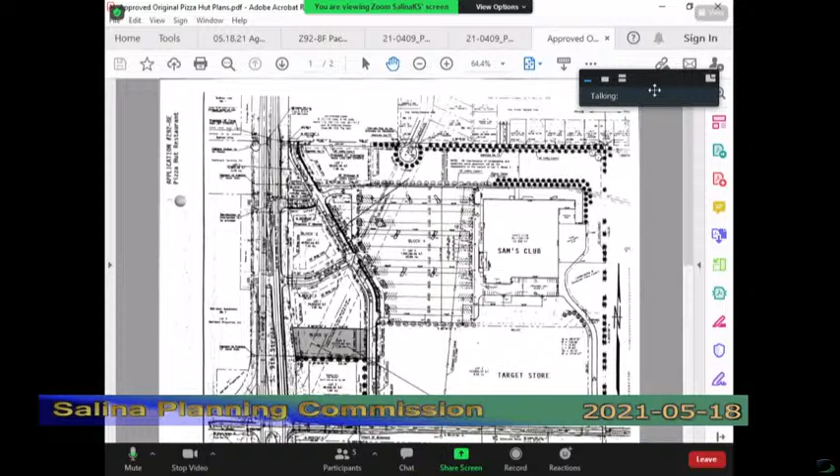But by way of background, what is labeled or known as the Matlock Johnson addition was approved by the Planning Commission in 1992. That was a subdivision at the northeast corner of Schilling Road and South 9th Street that was anchored by a brand new Sam's Club. There was a plat of 44 acres there that had multiple lots, including outlots along 9th Street.

The City Commission gave final approval to ordinances that annexed and zoned that property back in 1992, and it was a planned commercial district, so the ordinance that was passed provided that site plans for the remaining lots must be approved by the Planning Commission before building permits were issued.

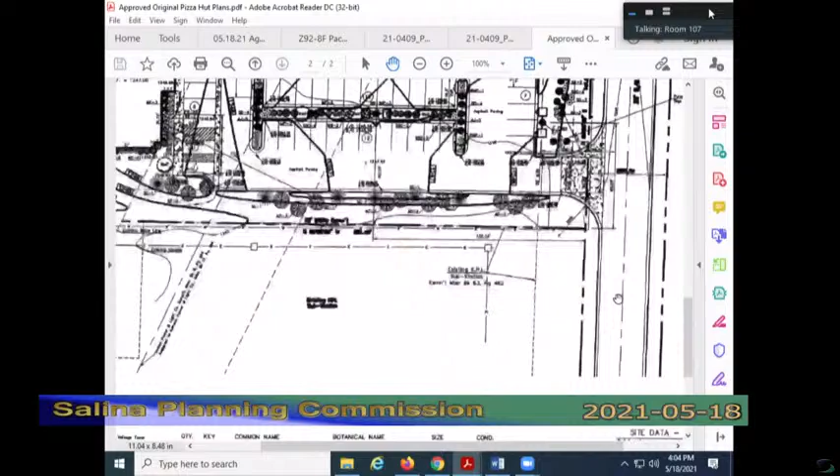So in April of 1994, Pizza Hut Restaurants filed an application requesting the Planning Commission approve their final site plan for a proposed 3,500 square foot Pizza Hut restaurant on the lot south of Red Lobster. That was essentially the 5th outlot outside of Sam's Club that was proposed for development, and it was the last lot to be developed in the subdivision.

Dustin, could you go back to the original layout of Matlock Johnson, the vicinity map? So the layout of the subdivision was 44 acres at this corner.

You may recall that Schilling Road was nothing more than a dirt road at that time, so the developers constructed Schilling Road over to an access road here, and then constructed Marketplace as a frontage road. At some of our intersections, like Belmont and 9th and other locations where we had frontage roads right next to 9th Street, there was barely room to stack one car or even get your car straightened out to make a turn. So we changed our planning philosophy on frontage roads, and instead of having the frontage road run right next to 9th Street, you'd move the frontage road out so that you had lots backing up to 9th Street, moving the frontage road away so you could have more room to stack traffic to 9th Street and move these entrances away.

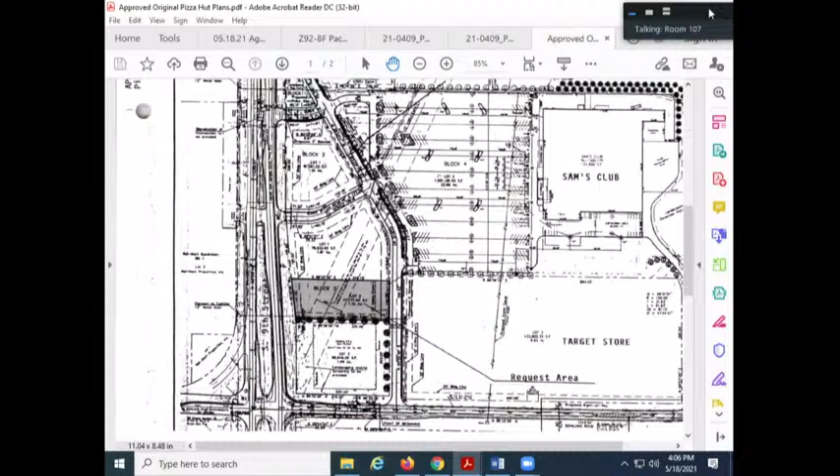So the original plan had a single building. It was 3,500 square feet, and it only covered 7% of the lot. It had no direct access to 9th Street, and the front of the building faced east towards Marketplace. When it was originally developed, they had 57 parking spaces out in that area. The building was pushed way to the west because it couldn't be built under these power lines, and that really influenced how the property was developed.

So the plan that's being put forward now is to essentially remove and rebuild that east building and turn the existing Pizza Hut restaurant into a delivery carryout location only, with no indoor seating, adding a drive-up window on the south side of the building.

There's also a plan to create a second tenant space there. As you can see from the original Pizza Hut plan, the east portion of this lot was primarily used for parking or not used at all. So the owners are proposing to construct a new building with a 2,000 square foot footprint, which could be set up to accommodate 1 or 2 tenants, and also set up with the ability to add a drive-through window on the west side if that's what the tenant desired.

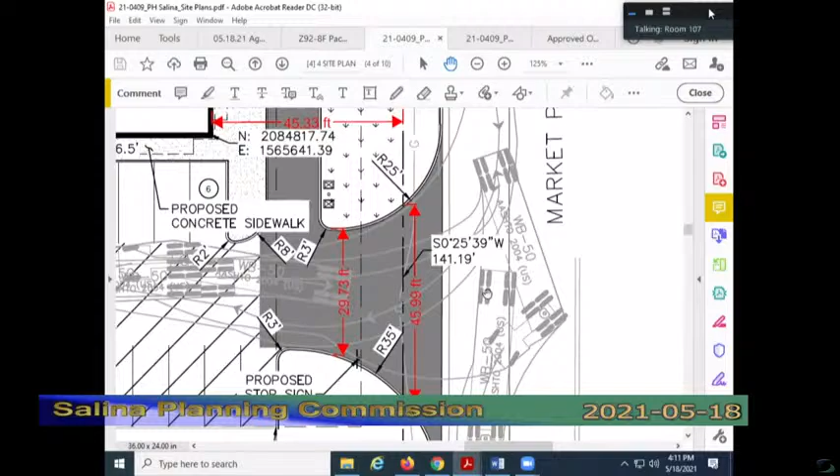We've noted that Sam's Club and Target both receive truck deliveries, and none of their driveway openings are as wide as the driveway being proposed by the developer's designers. None of the driveways that serve the new Dillons store are that wide, so staff believes that that is excessive for the conditions currently on the lot.

Just by way of information, the city, based on the city code, measures the width of driveway at the property line. What the designers have done is something most haven't done, which is to try to increase or include the radius inside the property. So on most driveways on public streets, the curb radius would start at the property line and fan out, but they have extended it farther in, which affects the measurement at the actual property line.

So this measurement here is a reasonable width right at 30 feet, but it's this width out here where we measure the width that makes that driveway width excessive. You can do what you want with the radiuses out within the right-of-way, but it's primarily this area here, on private property, that's wider than the city's driveway width standard and wider than any driveway anywhere in the vicinity.

As far as the public utilities and services and storm drainage, all the services that serve Pizza Hut are in place and can be reused for this redevelopment.

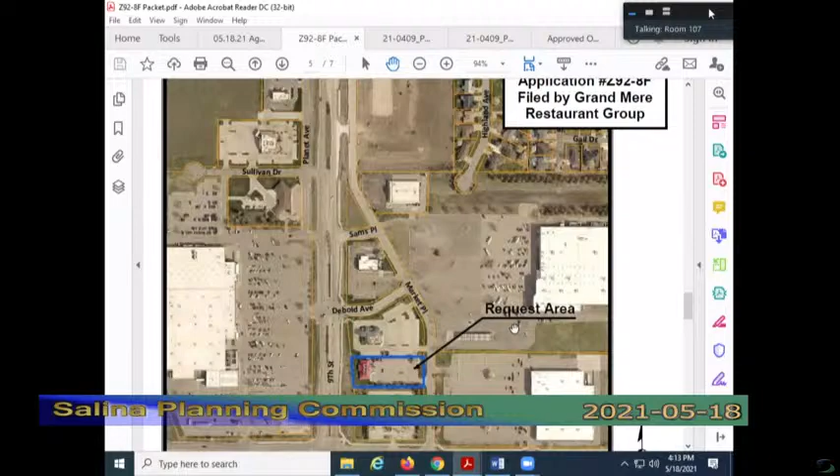So it's a little counterintuitive, but what happens with the drainage is that all this drainage from Sam's Club and from Marketplace here drains into this pond that's north of Sam's Club. Then there's a pump in that pond, and a pipe that comes all the way across here, and it sends the water right to this corner. It goes down 9th Street to a ditch that crosses over and goes that way. So the water first drains north, and then it drains south.

And the reason that it did is that there has been off and on flooding along South 9th Street from all the water moving from south to north, and so this was essentially reverse engineered to send the water back here so it wouldn't be discharged to the north.

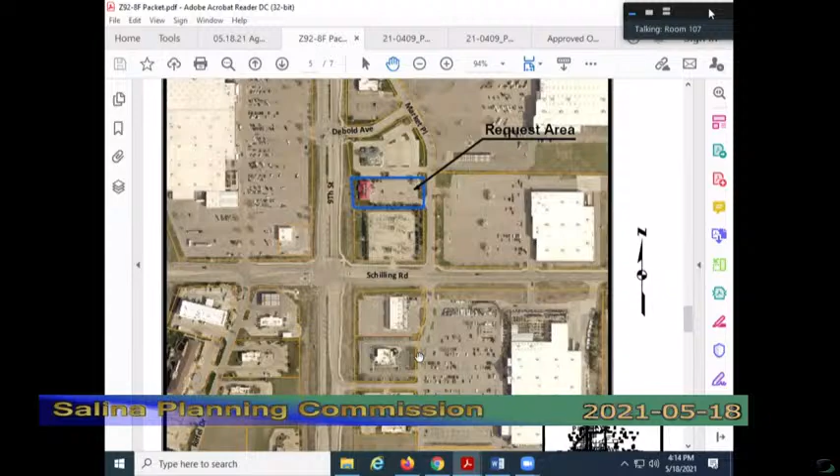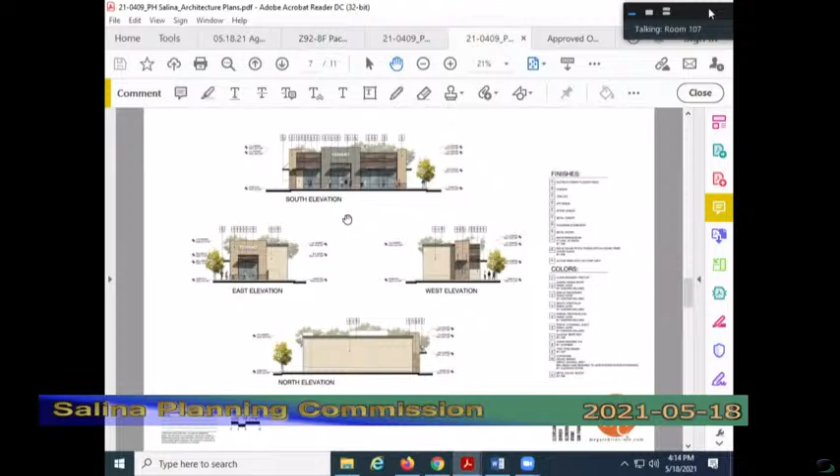The buildings that are proposed would be oriented to face east with their main storefronts facing Marketplace and secondary entrances on the south side. I believe that is the east building, Dustin? This is the east building. Okay, so the east building, you can see that the main storefront glass, the main width is the south elevation, but it will also have an elevation that's oriented towards Marketplace.

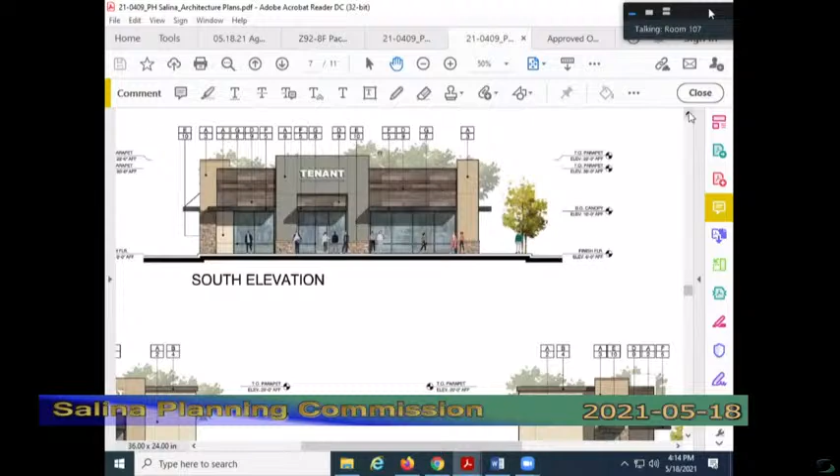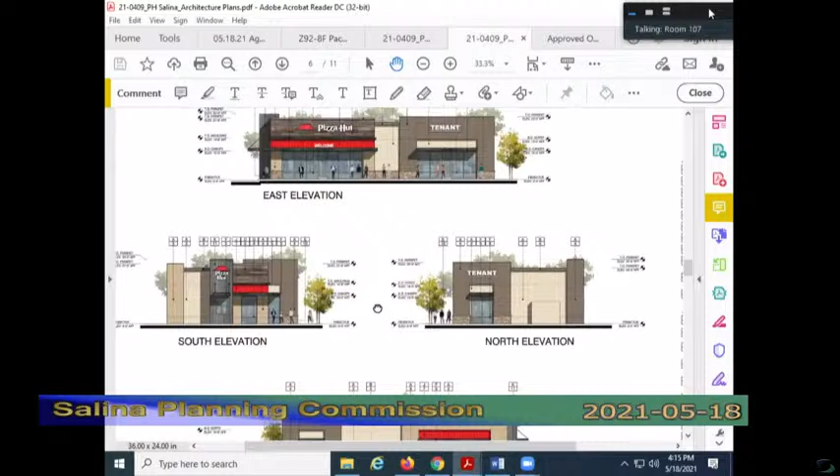So this south elevation facing the substation is where the pickup window for Pizza Hut would be. This is what you would see from Marketplace, this is what you would see from 9th Street, and then that is what is facing north towards Red Lobster.

The building setbacks all conform with minimum setback requirements. The west building, 27 feet from 9th Street, is pretty close to 9th Street compared to the other buildings along there, but it's because of that 100-foot wide Evergy transmission line easement that really forces that building to the west.

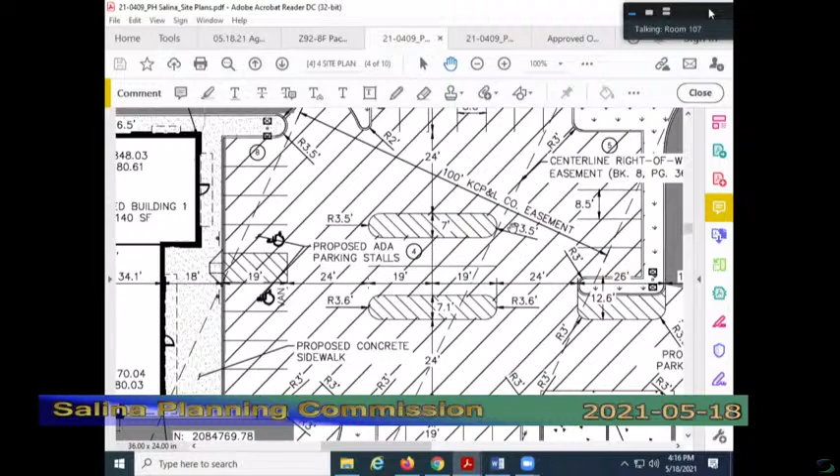So the big changes are that the lot coverage would increase from 7% to 10.7%. The other being that only 37% of the developed site would be green space.

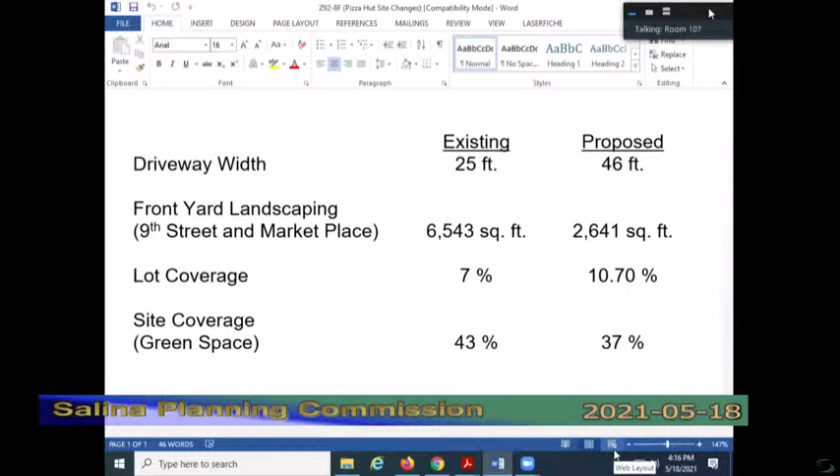As far as the building design, from what we can tell, the exteriors will be primarily cement plaster finish with stone veneer on the storefronts, and then mostly earth tone with slate color used to provide contrast. You can note the bright red canopies to identify the Pizza Hut.

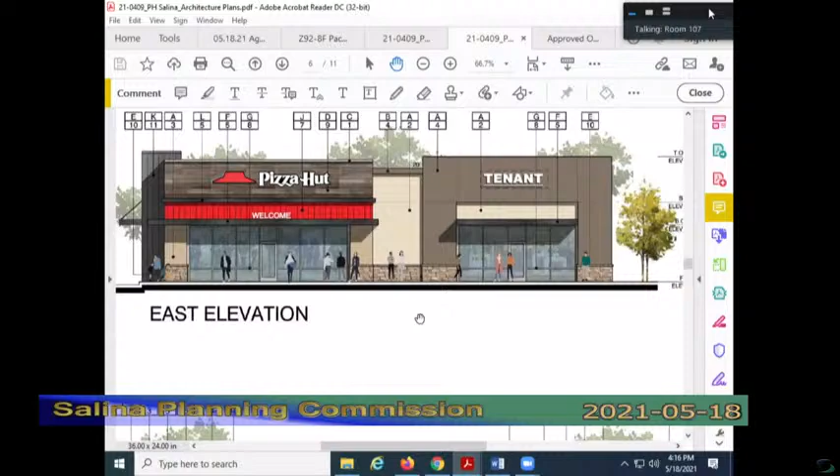As we noted, 45 spaces are being proposed, with the primary reason for the reduction being the elimination of indoor dining at Pizza Hut. We've determined that the 45 spaces is sufficient, and all of the dimensions within the parking lot and driving aisles meet the city's requirements.

Staff's only issue is with the width of the actual driveway approach on Marketplace.

There are no designated loading and unloading zones or areas designated on the site plan, but as we've discussed before, particularly with restaurants, in the alternative, we've allowed the property owner to furnish staff with a written letter confirming that supply deliveries for the Pizza Hut and other tenants would occur outside regular business hours. If you do that, it doesn't matter if drive aisles or parking spaces are occupied by delivering vehicles if it's after hours.

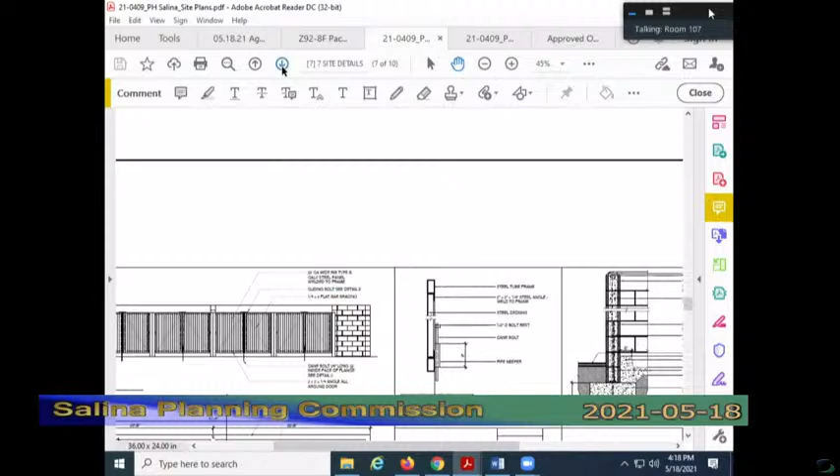The other thing we would note is that this development would have a requirement with the two front yards of a little over 3,900 square feet of front yard landscaped area, and they're providing about 2,600 square feet, about a third less than what would be required under our ordinance. The primary reasons for this are twofold.

One is the drive-through lane paving added to the west side of the west building essentially substituting concrete paving for landscaping. And then, of course, the wider your entrance drive is, the less space you have for front yard landscaping along South 9th Street.

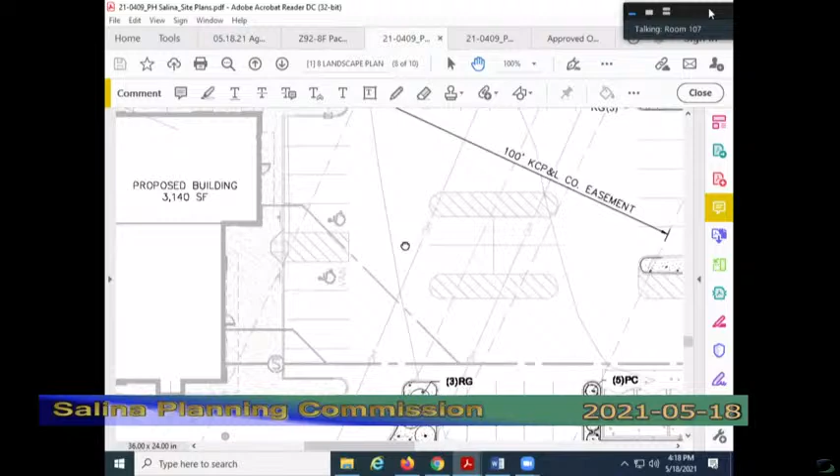One of the mitigating factors that the designers and owners are facing is that transmission line easement. Because the building is pushed so far west, if you put a drive-through lane on the west side, you've pretty much wiped out the 27-foot front yard there, so there's much less space for landscaping.

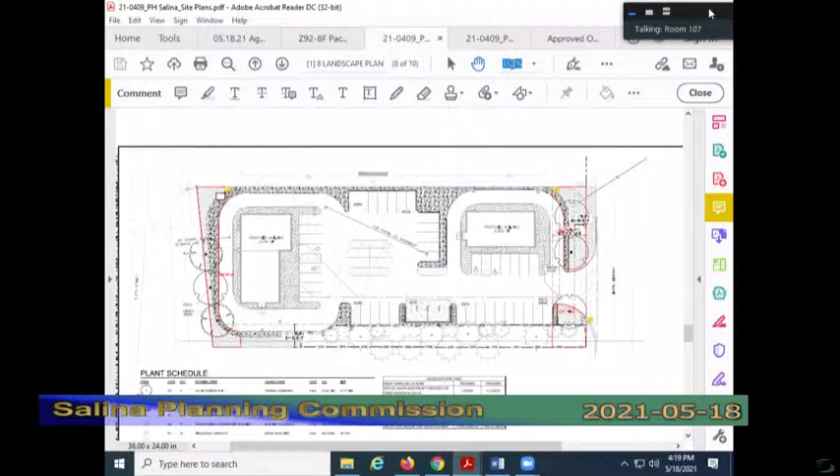If you look at the total amount of tree units provided, it's far, far less than what was shown on the original Pizza Hut plan, but is within the range in terms of actual plantings of what our landscape regulations would apply for a site like this with two front yards.

The only other subject we haven't touched on was signage, and we did not receive any kind of submittal related to ground or pole signs. The Planning Commission previously approved a 70-square-foot pole sign on 9th Street for Pizza Hut, and that sign may continue to be used or reused. Some of the elevation drawings did show wall signage, but that would be worked out with the owner as tenants come along.

So as you look at your alternatives this afternoon, we have reviewed the plan to determine compliance with city ordinances, regulations, and policies. The two areas that we determine do not comply with city standards are the amount of front yard green space and the width of the driveway on Marketplace.

You are to review the plans to determine if they demonstrate a satisfactory quality of design and compatibility with other uses and structures in the neighborhood.

So you could approve the proposed amended plan as submitted, or you could approve the amended plan subject to certain revisions or conditions.

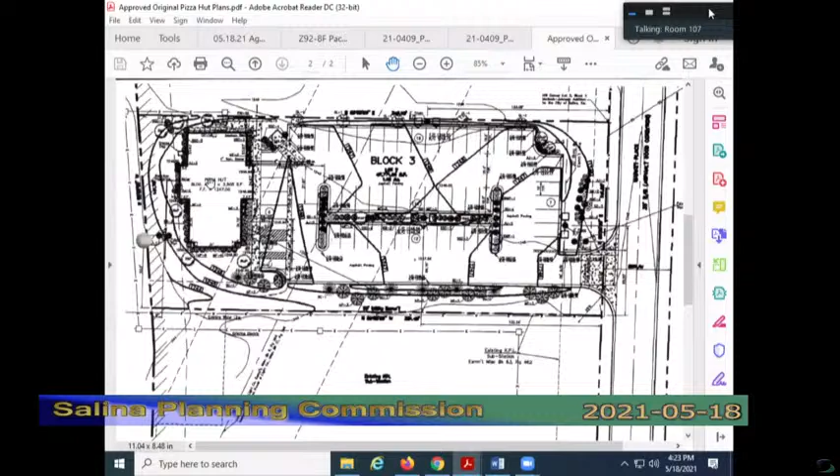The main thing is, and it may or may not show up clearly here, here's the existing Pizza Hut building. And so everything from this wall over to the 9th Street property line is green space and landscaping.

And then if you go to the new plan, they have wrapped this driveway around the building, so all this area that is landscaping today is being eliminated and replaced by paving.

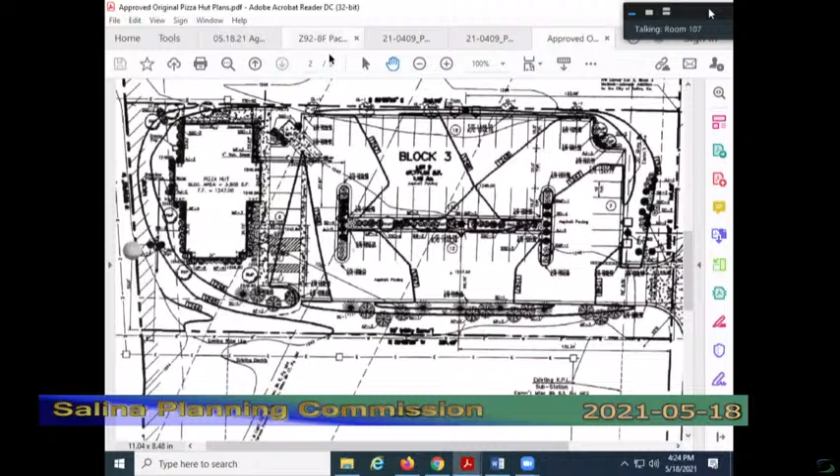So if you look at a front yard as the front 25 feet of the property on 9th Street, under the Pizza Hut original plan, 100% of the area between the building and the street was green space. Under this plan, a substantial part of it is paving. So by that very nature, the landscaping area has been reduced.

The question for the commission is, you can make up for reduced area by having essentially the equivalent amount of plants or plantings that you would have if you had more area. So we have kind of a ratio that says if you're required to have this much square foot area, you have to have this many plant units within that area.

They come close to having the number of plant units that they would need to have if they had the area. So they are attempting to compensate in two ways.

One, by having a roughly equivalent amount of plant material that would be required. And then also, they've got some islands or peninsulas within the parking lot area that we don't credit for front yard, but that does provide landscaping and green space.

So it's a judgment call for you as a commission, or myself as a zoning administrator. I can reduce, and you can reduce, the amount of front yard green space if you think the intent of the landscaping regulations is still being met.

So we're just pointing out that the reason for the large reduction in total square footage is primarily because this was all green space today, and if you put this drive-through in there, you're reducing the green space.

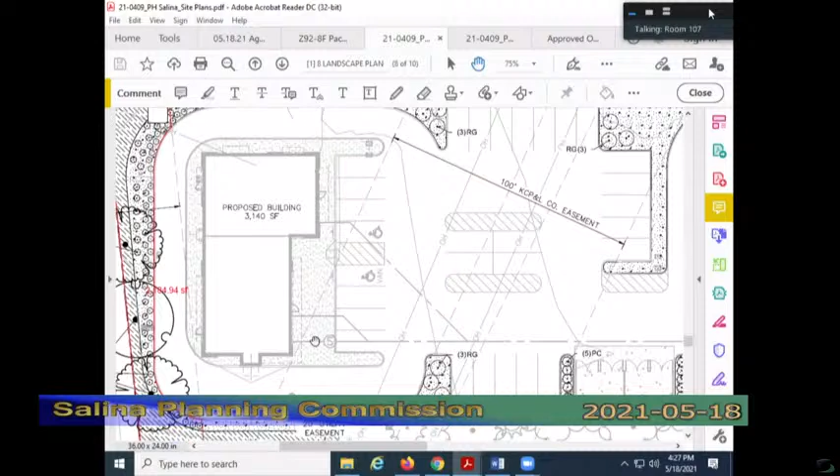There's nothing you could do on the west building. You can't shift the building. Well, can't you shift the building closer east and move everything east to have more green space along 9th Street? You can't do that because this is right to the edge, and Evergy will not allow it. They don't want tall trees, buildings, or fences—basically nothing vertical underneath their transmission line.

My take is that lot's definitely offering some challenges that are not the norm. So maybe a little leniency might be in order, but that's just my opinion. I don't know if anybody else has any thoughts pertaining to it. I agree, Greg. Yeah, there's not a lot of design options or shifting that they can do.

Right, so if you're gonna have a drive-through lane, you can't shift everything to the east, and circulation-wise, that's the way it best works out. It doesn't really matter whether you have the pickup window on the west side or the south side—that's the circulation that works.

But Dean, are those islands going to be landscaped by the parking right there? These do not appear to be—they appear to just be marking, just striped and marked. So we would expect that these would have curbs. These are really peninsulas, but we give them credit as islands.

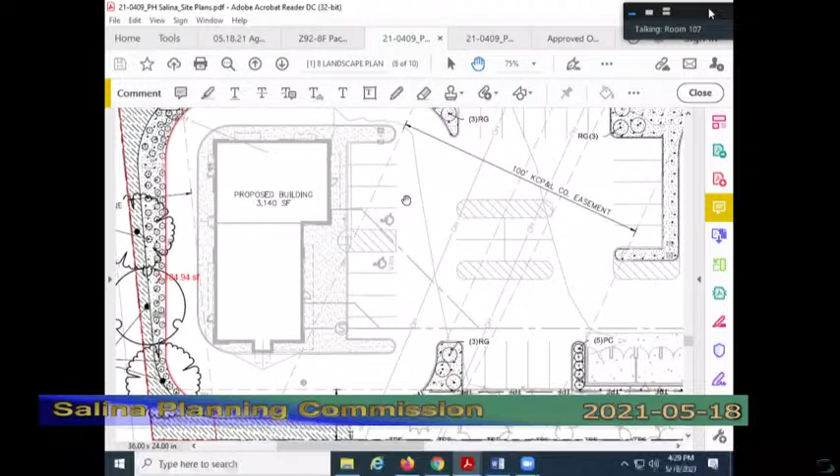It's just that our ordinance puts an emphasis on front yard landscaping to buffer the building from the street, but you, as a commission, are perfectly free to recognize the efforts they've made for the internal landscaping as well.

So I have a question then on this: current city ordinance is 25, or up to 30 feet for the driveway. Measured at the property line, yeah. Right, so what is the issue with going with a larger width? Why does that become an issue on the city's part? Well, is it determined at 30?

The reason it's at 30 is because the most common width is 25 feet, and 30 is the max. If you had a 46-foot street, people would be wondering if it's 4-lane, 3-lane, or 2-lane. If it's 30 or 25 feet wide, you can essentially fit 2 cars in it, one coming out, one going in. But if it's 46 feet wide, people may think there's a separate left turn lane, or they may come out in pairs, not knowing the pattern. So the reason for the 30-foot driveway is so cars know the right side's for exiting and the other side's for entering.

But if you're at 46 feet, is it 2 lanes out, 1 lane in? Once you get over 30 feet, drivers don't really know how it's set up, unless you've got an island or something like that. So that's the basis for the 30 feet. The other reason is that it applies in residential areas too, and you probably don't want your neighbor having a 60-foot lot and putting in a 60-foot driveway.

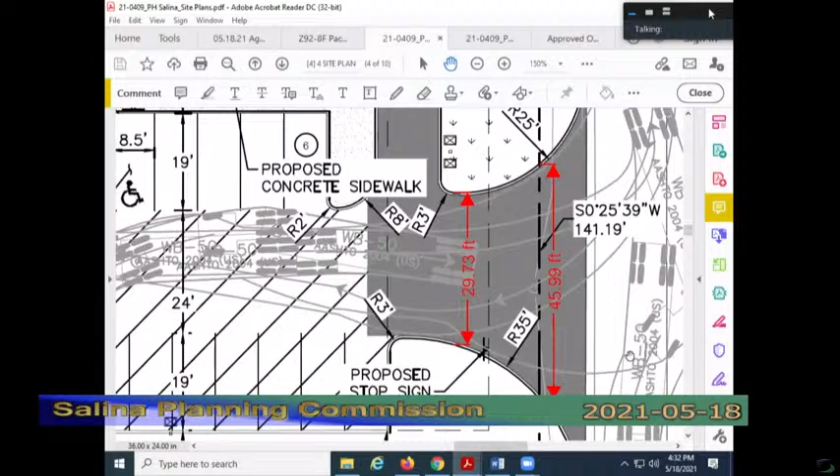Yeah, so for clarification, this says that the measurement is at the front property line, which is right where your cursor is, is that right? Correct. Okay, I'm just clarifying that. That's where the property line is, okay.

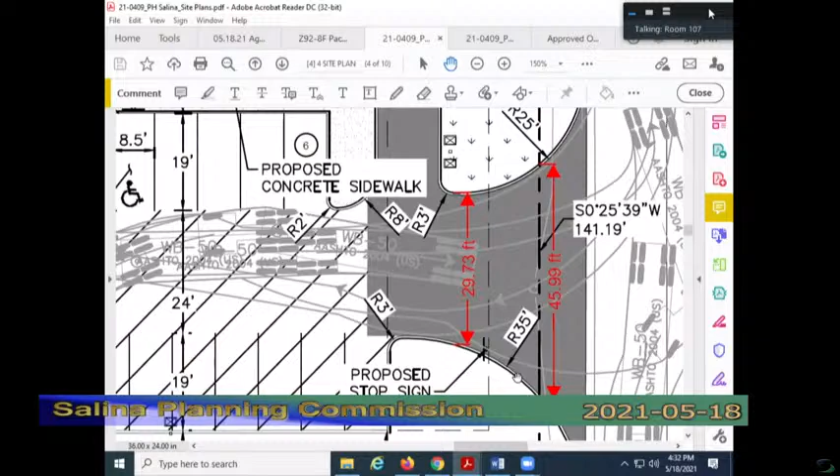So if they took this and extended it at the same angle out to here, then started their radius, kept this configuration, got to here, and had the big sweeping radius, it's basically this area here. You could say it's a technicality, but from the standpoint of being consistent and measuring that width at the property line, having a radius that sweeping is really unusual.

And so what we tell people, especially places trying to accommodate trucks, is that you can have as sweeping a radius as you want out in the right-of-way, but once you get to the property line going in, it has to be a maximum of 30 feet.

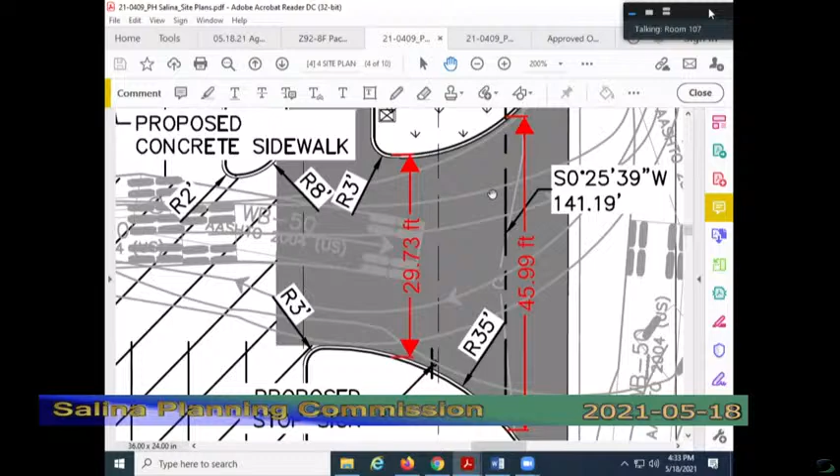The other challenge here is that if you have a street with 13 feet behind the curb, you have more space to have a radius. Here, there's only 8.5 feet from the curb to here, so if they straightened this out and then started the radius curve here, they could still have the sweeping radius for turns or to accommodate delivery trucks, but wouldn't have the 46 feet at the property line. So it's really the big sweeping radiuses that are affecting that.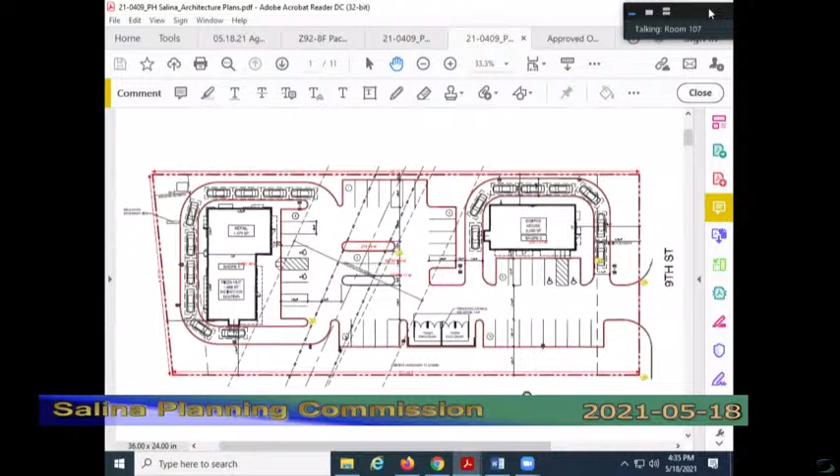So two questions going into this. The requirement for the number of cars through a drive-through, how many do they have to be able to accommodate at the pickup window itself? And where would the ordering station actually end up being, say on this first one listed as a coffee house? My question is, if the order station is towards the front of the building, then you're going to back traffic up as people are sitting there waiting to get in. I'm curious if that's not part of the reason for the wider drive and that sweep, that they're anticipating people are going to be stopped there and around that corner getting into it.

Yeah, so to answer your question, what we require is 4 stacking spaces at what we call the ordering station, sometimes it's a window, sometimes it's a microphone setup, and another 4 at the pickup window, for a total of not less than 8. And so they're not actually showing where that ordering station would be, but that is important. In this design, it would have to be about where my cursor is here in order for them to have the appropriate stacking.

And just so, Mr. Destin and I talk about that frequently, and I am frustrated every time I go there, but we misread the plans for the taco place in front of the mall. So they have like 1 stacking space at the ordering station because we misread and they misidentified. What they have is 7 stacking spaces from the drive-up window to the ordering station, but only 1 stacking space at the ordering station, which means if you get very many cars there, the cars are all hanging out into the Central Mall's drive-through. So Mr. Olson's point is well taken as far as the Taco Bell there goes.

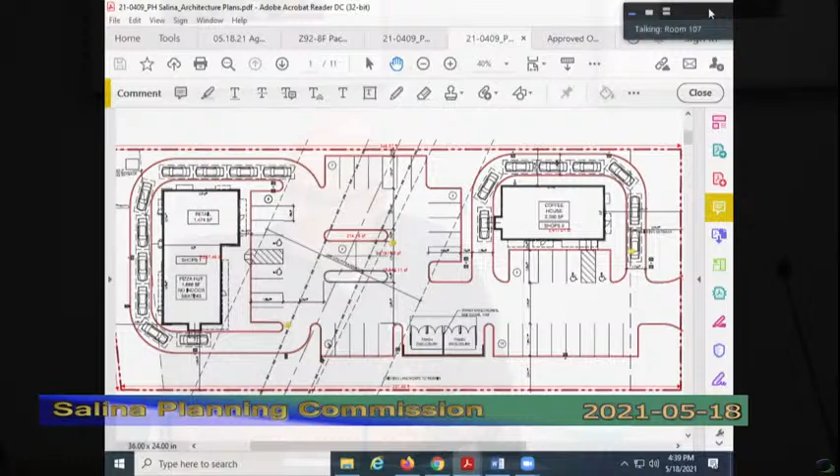So since we've been on the topic of the drive as it is, can you explain to us what your reasoning is for the 46-foot width of the driveway at the property line?

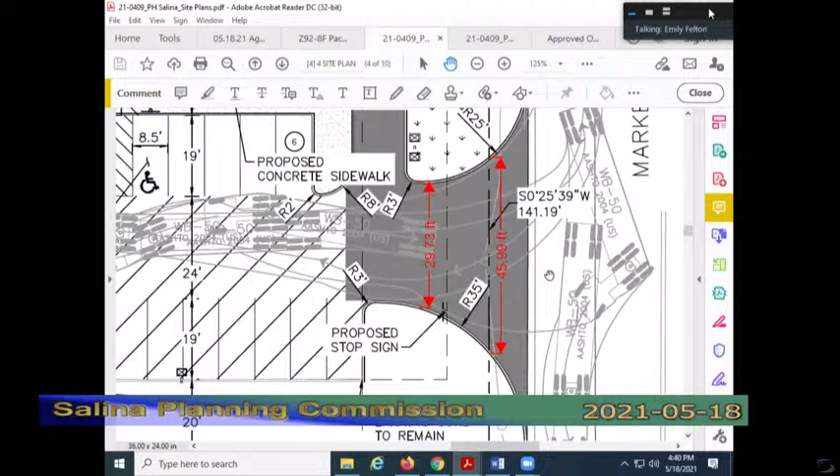I'm going to defer to our civil engineer, but I believe that we can accommodate the city's request to reduce that size. My name's Emily Felton, I'm working with Monica on this project. The exact reason why we're proposing this, you'll see grayed out in the background, is we've got a WB50 truck who's going to come in and go back out. There's not enough room on site for them to turn around and for a truck to back directly out into our site, and so that would be our why. They'll just have to swing out into adjacent lanes in order to make those deliveries work.

We're not anticipating those deliveries happening at peak hours. As you can see, and we discussed the loading here, we haven't designated loading spaces because we do not anticipate the loading to occur during normal business hours. But to answer the question on the table, I believe we can get it down to 30 feet at the property line.

Okay, thank you very much. And I missed part of that. Where's the proposed loading at for each of those locations on this diagram that's up currently?

So the proposed loading, the truck — and you see it grayed out in the background on your screen, thanks for sharing — the truck is just proposed to pull straight in and then pull straight back out. There is no striped area. The loading is, because it's not occurring during peak hours, there's not a designated station or parking space for this.

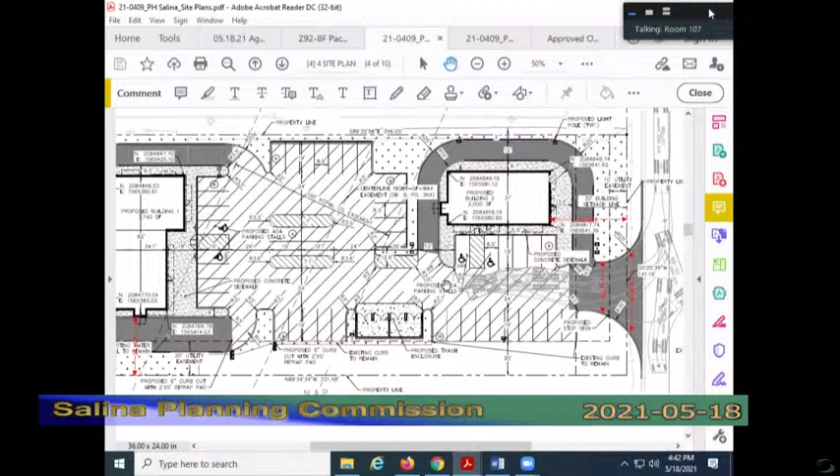So what they're saying is consistent with what we've had with Freddy's and Chick-fil-A and others, is that rather than taking up space or designating a specific spot for a loading/unloading zone like you might have behind a grocery store or behind Sam's Club, what they're proposing is that they'll just utilize these areas, and we don't want them to be in conflict with when they have customers there. So what they would do is just agree that deliveries for the two tenant buildings would occur after business hours, so there wouldn't be any conflict. That's kind of common with trash pickup as well — a lot of these businesses arrange to have their trash picked up at 5 or 5:30 in the morning when they're not open for business, so the trash trucks and delivery trucks aren't conflicting with parked vehicles. That's fairly common when you have a food service business.

I can see the 46 feet if a semi's going to have to park and back out though too. I know it's an odd situation on an odd lot, but it's not so much the ability to have 46 feet, it's just where the 46-foot width is. There's nothing wrong with their radiuses, it's just a matter of where the taper starts.

Any other questions for the applicant? So we just, and maybe they can reiterate what their approach was to their landscaping plan, but just what the deciding factors were in their design and their proposal. Obviously, the addition of the drive-through lane west of the west building eliminates that green space, but we might ask the applicant what the guiding principles were for what they're trying to achieve with their landscape plan.

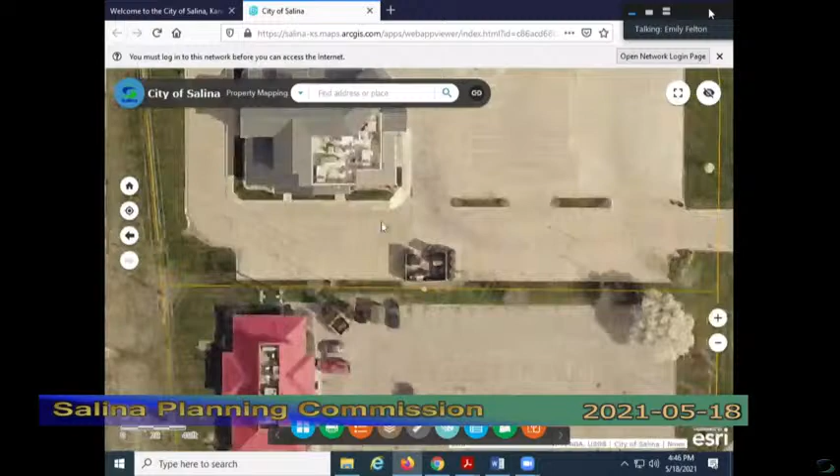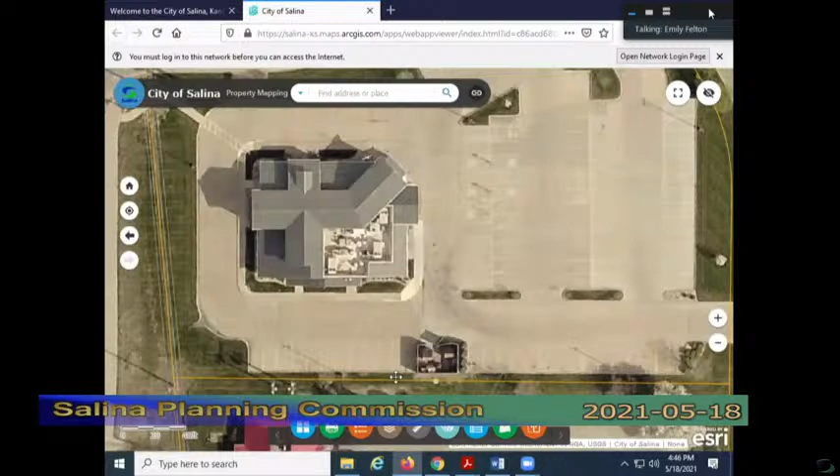And actually, if this is a great aerial image, you'll see how close the driveway is north of our site with Red Lobster. So the reason why we felt it was okay to put a drive-through on the west side of our site is consistent with the site to the north.

And we're actually not as far west as they are with our pavement limits, but mirroring what's out there today. Yeah, I think we're primarily just trying best to understand what landscaping that was there today you were going to try to preserve and what was going to just be starting from scratch new. So that helps a lot.

Any other questions for the applicant? Thank you very much. We really appreciate your clarity on that. It helped quite a bit. Thank you all for hearing this. Oh, we have one other question.

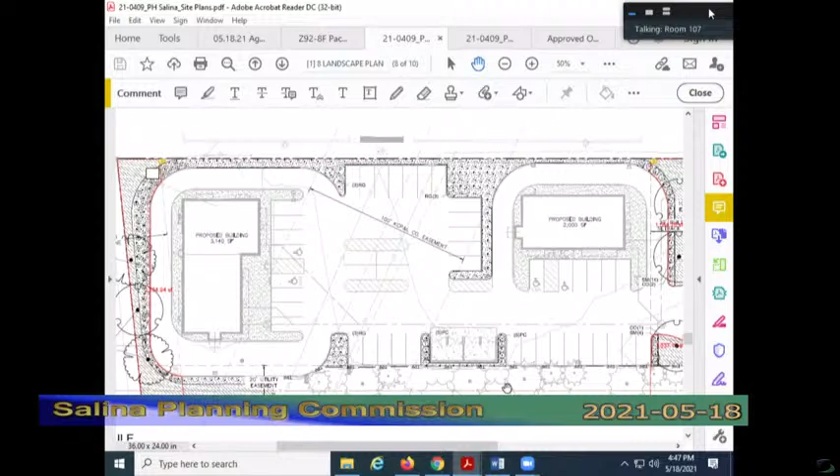It just relates to, as part of the elevations and everything submitted, there wasn't anything proposing any new signage. Are you just going to primarily focus on building signage and reuse the sign that's out along 9th Street?

I'll try to take this one. We can do one pylon sign, if that works. We have a signage package that we can submit to planning or to this board. Apologies that it wasn't routed earlier, but we do have a signage package, as far as freestanding signs go. Is that what you're concerned with?

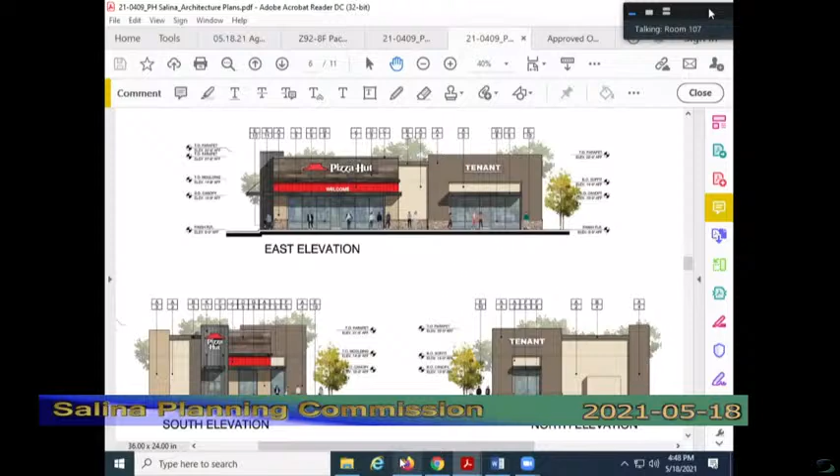Yeah, primarily, for instance, there's an existing pole sign out along 9th Street. I think that pole sign, square footage wise, might be the smallest one along that frontage. So if you said, well, we want to reuse the existing pole, but we want to increase the sign area on the sign, that would be fine. I think this board is primarily interested in whether you were looking to add additional freestanding signs or a sign on Marketplace or any of those things. That would be good to know at today's meeting before they act.

Gotcha. Yes. And so one additional, but yes, you're exactly right. We would look to reuse that existing pole sign and then add a sign underneath for future tenants. So Pizza Hut will no longer be the only tenant here. We would like to add to the square footage of that sign and then a monument sign along.

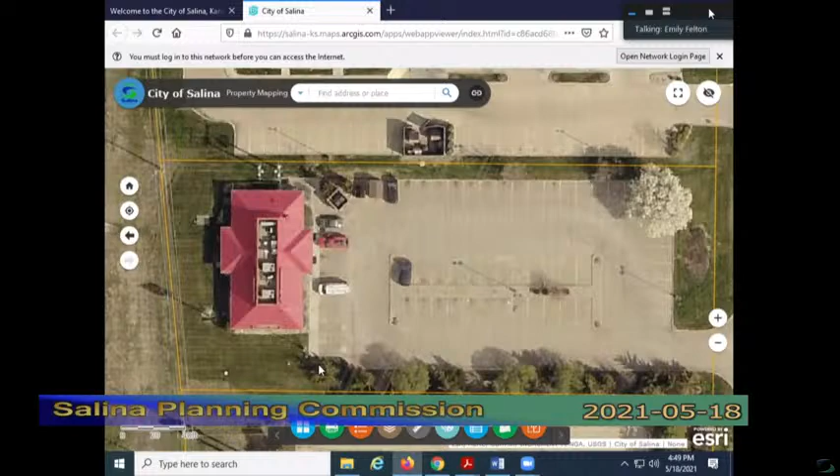So I think those were the 4 areas where staff had some questions about the driveway opening, about the front yard total area, the loading and unloading, and any planned signage. And I think that the applicant hit on all those.

The only thing I would point out would be to look at condition number 1 on page 8, and given the fact that the applicant is requesting the addition of a monument sign, then it may be appropriate, if the Planning Commission is supportive of that, to amend condition number 1 to say, instead of the word or, have the word and, so that signage shall be limited to one pole sign and one ground sign as opposed to or. Given their plans to try to put a monument sign out along Marketplace, we would want to try to accommodate that in condition number 1.

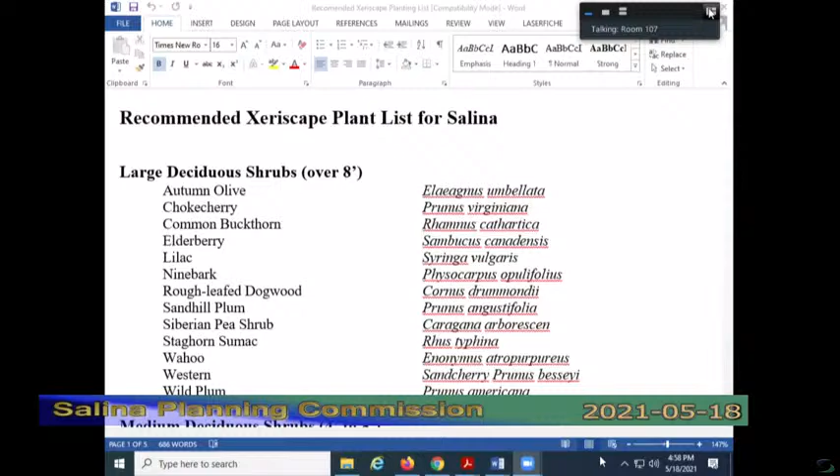In our research and conversations with subject matter experts, we engaged a number of people to create a recommended Xeriscape plant list. The individuals and entities we worked with at that time were the Salina City Forester, Steve Blue, who has since retired, the K-State Extension Office, the Dyck Arboretum of the Plains out of Hesston, and local landscape providers who were actively designing plans and maintaining existing landscaping.

This recommended list consists of different types of plantings: shade trees, ornamental trees, shrubs, ground covers, and flowers that are conducive to our climate zone and annual rainfall, and are hardy to hot conditions as well as cold conditions, because here in Kansas we get extremes on both ends, and not all plants can handle that situation.

So what we have is a list of plantings that, if you were to select from this list, will have a high chance of survival with minimal maintenance.

The reason we're bringing this up today is that in the past some commissioners have had a couple of concerns. The first concern is that this list was created in 2008, and since then other varieties of plantings are now available, many of them more popular, meaning some of the plants and trees on the recommended tree list are now a little more difficult to find than they were in 2008.